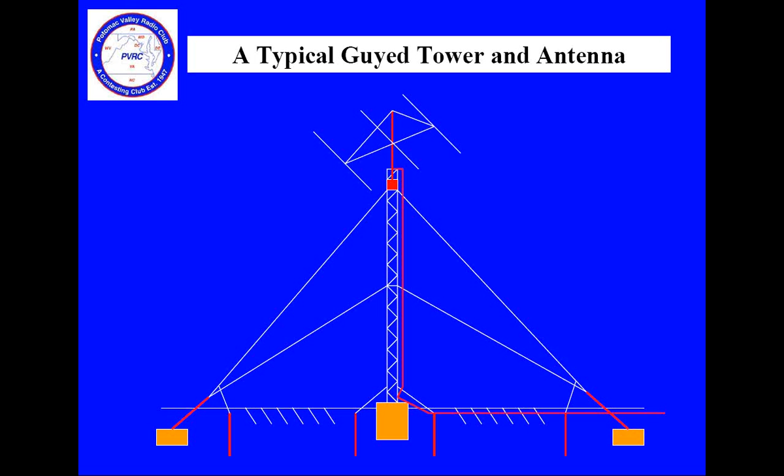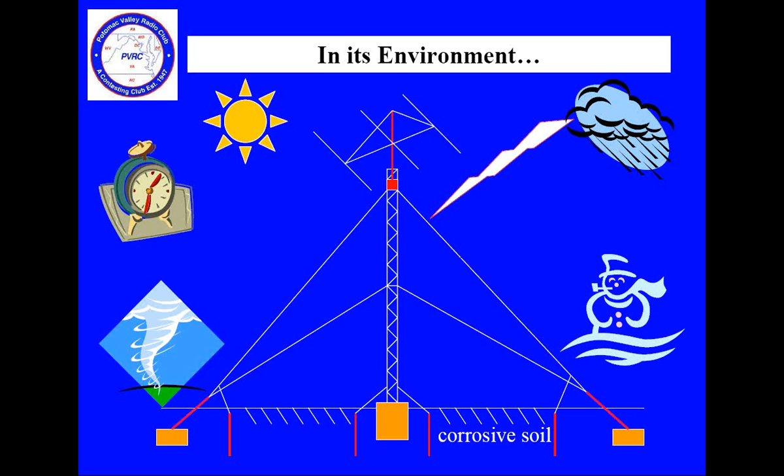But that's not all you have to worry about, because in terms of long-term survival, this nice new antenna system and tower is subject to wind and the passage of time, ultraviolet radiation, rain, perhaps very heavy rain in some areas, snow and ice. And in many parts of the world, the soil is also unfriendly to tower foundations and ground systems. So all of these things are factors that will wear away at your antenna system despite the very best job you might have tried to have done.

So let's get started. The presentation takes the form of checklists all the way through. For each element of a tower and antenna system, there's one checklist that considers important factors when designing and building a new tower and antenna system, and a second slide deals with maintenance considerations to keep the system functioning in tip-top shape for a long period of time. I won't read these slides, but I'll focus on some important points. If there are questions about points I don't discuss, I'll be happy to speak about them.

By the way, before I get into the presentation, for those who aren't aware, there's a very excellent reflector where these sorts of questions and discussions come up every day. It's on the contesting.com website, and it's called Tower Talk. A lot of these topics are discussed there from time to time, and if you're planning a new system or thinking about a maintenance problem, it's a very fine place to raise these kinds of questions and get useful answers.

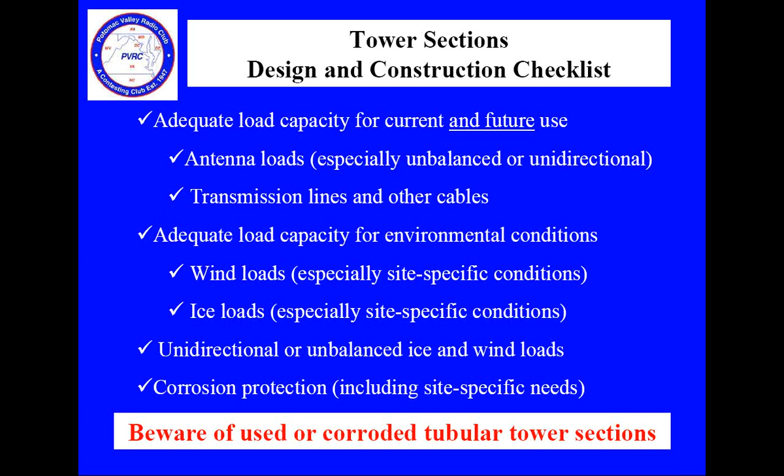In terms of maintenance, when you build a new tower, you should inspect it a year after install, just to be sure nothing surprising has happened. After that initial inspection, every 3 years you should do a very comprehensive inspection of your tower and antenna system. It doesn't take that long—go through the checklists, think about what you want to look at, climb the tower or get a friend to climb it or pay someone to do it, and check it over thoroughly. After that, the tower should be good for another 3 years.

On very tall towers, particularly over 100 feet, one thing you should do is check that the tower is plumb—that is, vertical—and that it hasn't become twisted. Except for very large antennas, most hams won't have the problem of a tower twisting, but it's very common to see towers that are no longer vertical.

To check that a tower is vertical, the most practical thing is to use a surveying instrument—perhaps you can borrow one. Another easy way to quickly check it is to use a plumb bob: hold it in your hand, let it drop to the ground, and compare the tower in the distance to that string in front of you. That's a good, quick and dirty way to do it, but a surveying instrument is better.

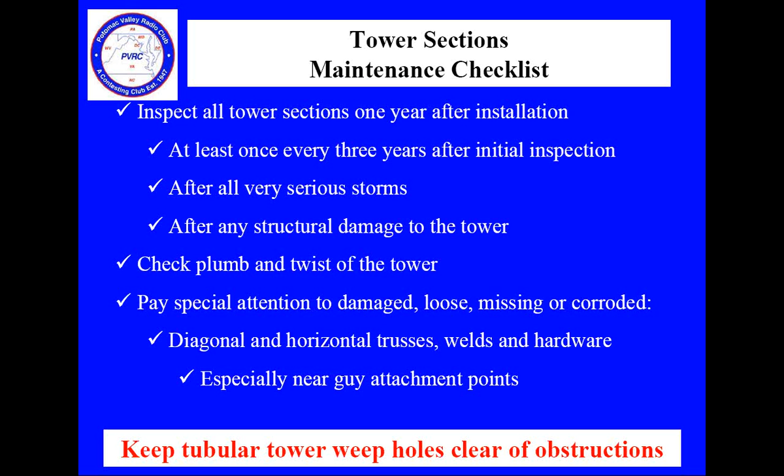One of the most common problems with tubular towers is that the weep holes at the bottom might become jammed with debris that's gotten into the tower, so check those for obstructions. A fairly common problem, more common than you'd think, is that sometimes people forget to take tower hardware out of the legs. When new Rohn towers are shipped, the hardware is often packed in the legs, and people install the tower without realizing it, which can jam the legs as things accumulate. So before you install a tower, check that the legs are all clear of obstructions and nothing is jamming them already.

Okay, so let's move on to the tower foundation. All the manufacturers have published designs—it's always wise to use their designs. If you live in an area subject to heavy frost, you might want to modify that design to make the foundation a little bit deeper.

Probably the most common error that hams make with foundations is to not have the top of the foundation well above the surrounding surface of the earth, the nearby ground. It's pretty common to see hams who thought, someday I'm going to take this tower down, and I don't want to worry about destroying the top of the foundation, so I'll just end the foundation a few inches below the surface of the ground. Well, this is a prescription for disaster.

It's very difficult to keep the top of a foundation clear if it's at ground level or slightly below. Dirt and leaves will accumulate there. The result will be that the top of the foundation will be continuously wet, and you'll develop corrosion at the point where the tower attaches to the foundation, which can lead to tower failure in just a relatively small number of years. So the best thing to do is to raise that foundation about 6 inches above the ground, and then occasionally check it when you're around it. If anything has accumulated on it, it should be removed.

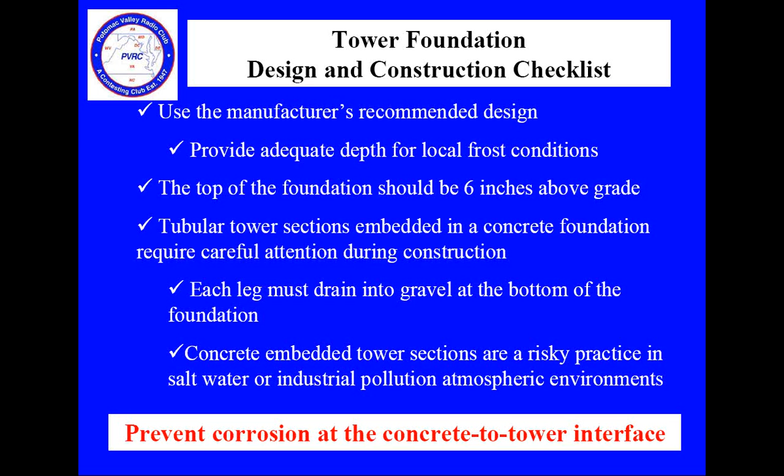In areas that are subject to salt spray, this idea of embedding towers into concrete is probably one that you really shouldn't do, because you can get salt water accumulated in those legs and it can do a lot of damage. So the best thing to do if you're in a waterfront, oceanfront location is to use a pier pin foundation. The takeaway here is corrosion at this interface between the concrete and the tower legs is really the key point, and you really want to pay attention to that. Some of us actually apply some paint to that junction just to make sure it stays clear.

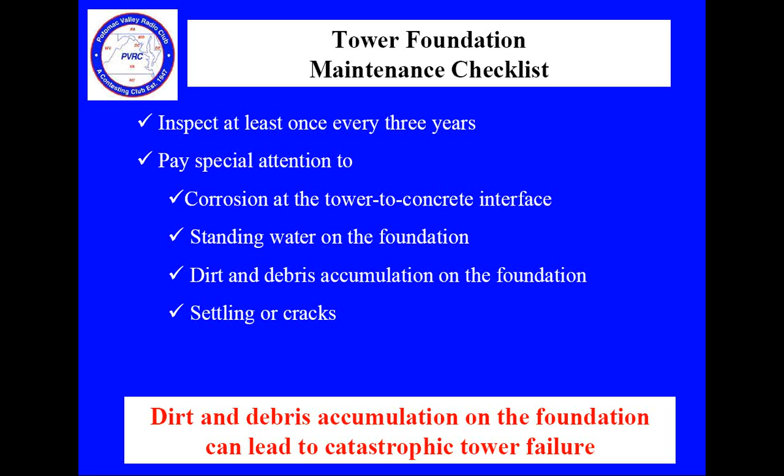In terms of tower foundation maintenance, inspecting it once every 3 years is okay. Whenever you're out near your tower, take a look and see if any junk has accumulated on that foundation and clear it off if it has. If you notice water is standing on that foundation, you might want to consider resurfacing it so water cannot accumulate there, because that will contribute to corrosion at the point where the steel and the concrete come together.

Guy anchors are probably one of the most common causes of tower failures, and they can be really catastrophic. Many areas in the world have corrosive soil. If you think you're in an environment like that, you really need to take some extra steps. Placing steel in direct contact with corrosive soils is probably not going to last for 10 or 20 years. There are all kinds of horror stories about people who've put guy anchor rods in direct contact with corrosive soil and found out 10 years later that there's really not much of an anchor left. So if you have corrosive soil, you might want to think about using a concrete guy anchor and only having the steel in contact with the concrete, not with the ground.

A common error is for hams who are less experienced with towers to go to the local hardware store that sells items to homeowners and buy guying material and guying hardware from that store. That's a really bad idea. I've never seen heavy-duty forged hardware for sale in these homeowner type stores. You really want to buy all of your guying hardware from a company that sells towers, and they will have the right stuff. There are plenty of those companies around the world, and that's where you want to buy this hardware. If you really can't find anything like that, then an industrial supplier that supplies the shipping industry or crane companies will have the right hardware also. But you're better off buying it from a tower distributor.

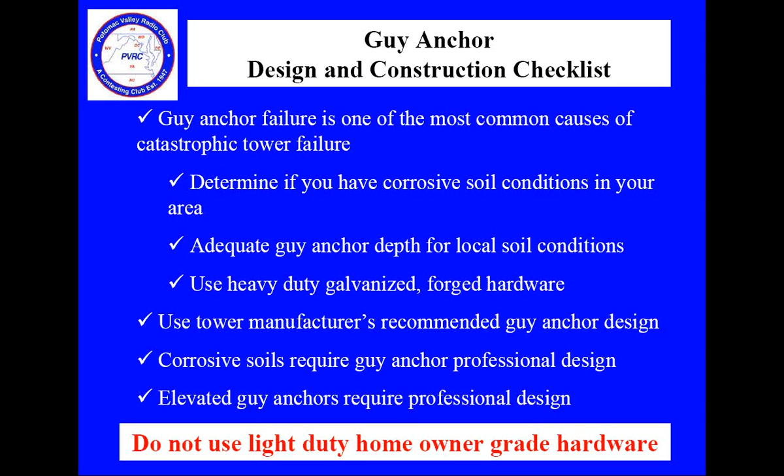You always hear from hams that want to put up elevated guy anchors. It's a very common thing you might want to do to keep lawn equipment and people away from the guy anchors. But if you want to do that, the design for an elevated guy anchor should be done by a professional. Just going to the local hardware store, buying some pieces of pipe, putting it in the ground with a bit of concrete is likely to lead to a tower failure. So this is one of the few areas in this presentation where contacting a professional to design those elevated guy anchors could save you a lot of trouble.

In terms of maintenance, this is another area to look at every 3 years. If you have steel in contact with the earth, as you might with a galvanized steel guy anchor, just take a shovel and dig down 6 inches on one side of the anchor and make sure there's no unexpected corrosion there. If there is any, time to start thinking about replacing that anchor. Look for missing hardware, loose hardware, or corroded hardware.

I usually keep a pretty good track of this, but I was replacing some old guy wires just 2 weeks ago, and I was shocked to find that one of the bolts on one of my turnbuckles was nearly completely loose, and that could have led to a disastrous failure, and I had missed that. That particular anchor was in a place that was a little hard to get to, and I don't think I had actually checked that particular bolt in quite some years. It's probably been loose for a long time, and that could have been disastrous, but thankfully we caught it, and hopefully that's the only one.

So I'll just focus on the importance of anchor rod corrosion. It's useful every 3 years or so to just get out the shovel and take a look at that anchor and make sure it's okay.

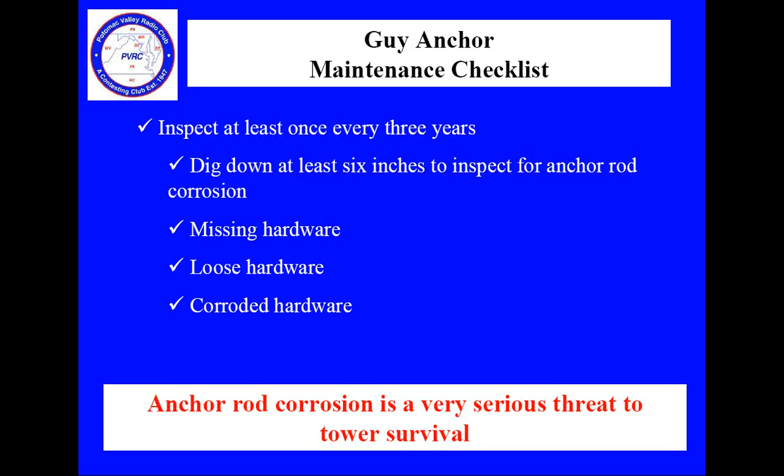I think I went one too far here. Guy wires.

Don't use that homeowner grade guy wire material or galvanized wire clips. Get it from a hardware company. Use the manufacturer's recommended guy wire size. This is an area where you don't want to use guy wire that's smaller. If it says use 1/4 inch EHS, use that, not 3/16. Also don't use heavier wire either, because you have to tension it heavier and you reduce the capacity of the tower. So use the recommended guy wire size.

It's recommended that you tension the guy wires at about 10% of the breaking strength of the guy wire. Precision isn't important here, but about 10%. If it's about 7% or less, the guy wire will be noticeably loose, and when you get a heavy wind, the tower is going to have excessive movement as it tightens that guy wire. Similarly, if the guys are too tight, it reduces the capacity of the tower and also risks guy wire vibration.

For those of you who use fiberglass rod for guy wires, that's what I use rather than Phillystran or steel. If you're in an area that's clear of obstructions, you might have a problem with vibration. If you do notice vibration in your guy wires, it's important to do something about it, because that can damage your tower.

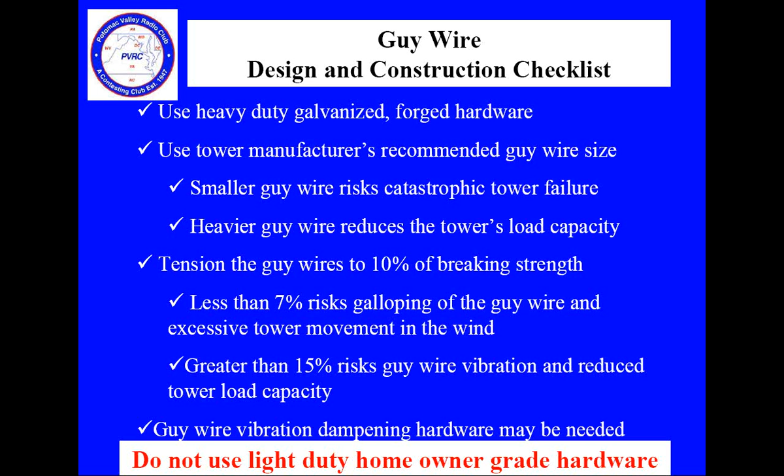You can buy from Preformed, the same company that makes the Preformed guy wire attachment hardware, vibration dampeners. So if you notice vibration on your guy wires, you really need to do something about it, because it can lead to catastrophic failure.

In terms of maintenance, this is one area, because there are so many attachments, that it's a good idea with guy wires to inspect them 3 months after the tower installation is complete, and then once every 3 years is okay. Also, if you ever have a very serious storm, either heavy ice accumulation or very intense wind, it's a good idea to check your guy wires after that too.

Once every 3 years, you should check the guy wire tension. Once you get used to what a guy wire looks like when it's under the proper tension, usually you can just grab it with your hand and give it a good tug, and you can tell when it's approximately correct. If the guy wire moves a lot, it's too loose, and if it barely moves at all, it's probably too tight.

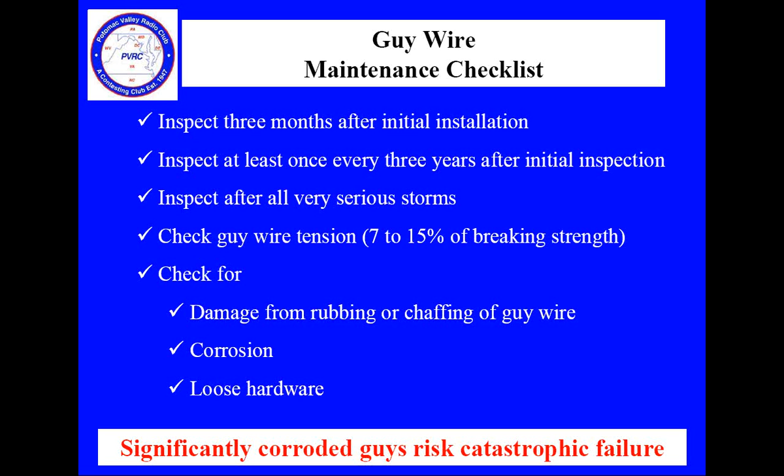Guy wires can get damaged by rubbing or chafing on other objects, especially other antennas or other guy wires, so be sure there isn't any rubbing or chafing. I'm in the midst right now of replacing all of my guy wires. They're 25 years old, and corrosion has gotten to be a problem. So if your guy wires are getting to be 25 years old, if you start to see rust on them, it's a good idea to start replacing them. And I already mentioned the loose bolt that I found on my guy wires a little earlier.

Another very important consideration is the point where the guy attaches to the tower. If you're using a guy tower, you should be using the tower manufacturer's design. None of them recommend running the guy wire around a tower leg. They all have attachment hardware, and that's what you should be using. Should be using professional hardware, as I mentioned earlier. Turnbuckles should have safety wires around them to make sure they don't unwind.

Many of you have probably not heard of this term, articulated guy wire connections. What this means is, in the wind, the guy wires are going to move, and they should be free to move. The hardware you use for attaching the guys to the tower should allow free movement of the guy in any direction, about 10 degrees. So if you're using shackles and that kind of hardware, you'll get this kind of free movement. If you don't have this free 10-degree movement, it's

really not a properly done installation, and could damage the guy wires over time. And I actually did have a failure of this kind years ago, where I attached a guy wire directly to an anchor without any intermediate hardware, and the rubbing over years of the guy wire on the anchor ultimately caused the guy wire to fail. I did not notice this until the guy wire was actually broken. So you really shouldn't be attaching guy wires directly to anchors. They should be attached through some intermediate steel hardware.

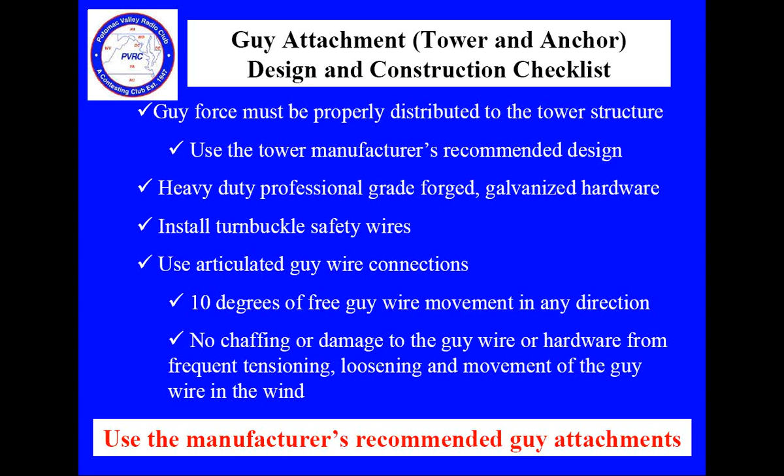So I'll just close this one out by saying do what the manufacturer recommends. And in terms of the guy attachment, in your once every 3-year inspection as you climb the tower, take a look, especially at the point where the guy's attached to the tower, and make sure all is well.

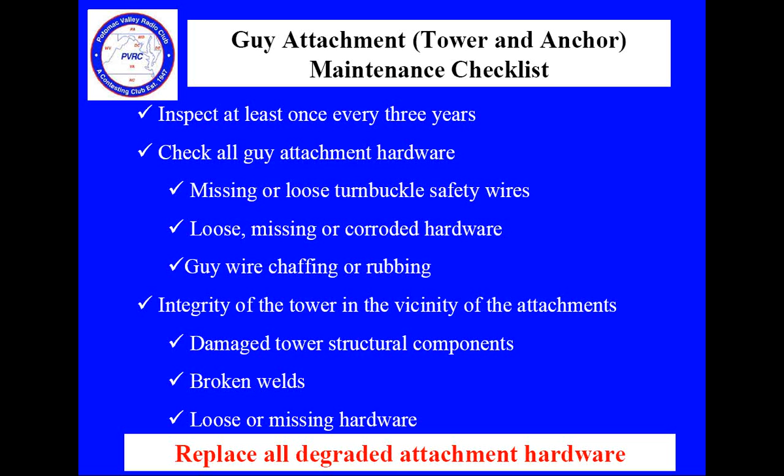At the guy attachment on the ground, make sure that those safety wires are still there and there are no missing pieces of hardware. You don't see any evidence of chafing or rubbing. When you climb the tower, or someone does that for you, carefully check for any damaged structural components on the tower, especially near the guy attachments where the forces are the greatest, and look for any broken welds. And if you find any degraded hardware, it's a good time to replace it.

Well, if you're in an area with lightning, and most areas in the world are subject to lightning, part of the design of the tower should be the grounding system. The kind of minimum lightning protection system would be one ground rod adjacent to each tower leg. And normally those ground rods are separated from the tower foundation about 8 to 10 feet and separated from each other about 20 feet.

Today, tower manufacturers recommend, believe it or not, using galvanized ground rods rather than copper. And the galvanized ground rods are readily available from electrical suppliers in the United States. If you can get a 10-foot length, that's the preferred length, although 8 feet is more common.

And the tower manufacturers no longer recommend using copper wire to attach the rods to the tower. They recommend using tinned solid wire. The reason for this change is to eliminate galvanic action. Copper grounding hardware and galvanized steel towers can lead to a corrosive environment, so the manufacturers no longer recommend using copper rods and copper wire. They're recommending galvanized rods and tinned ground wire.

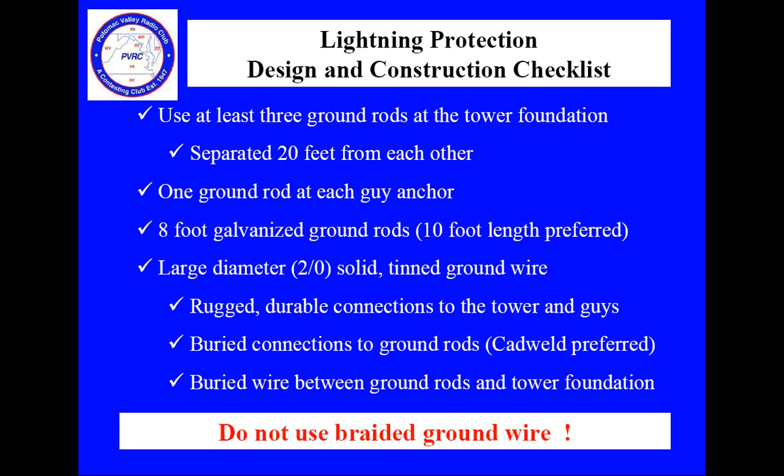In terms of maintenance, check your lightning protection system once every 3 years, mostly for missing hardware or any damage that might have occurred from lawn equipment or something of that kind. And if you find a problem, repair it.

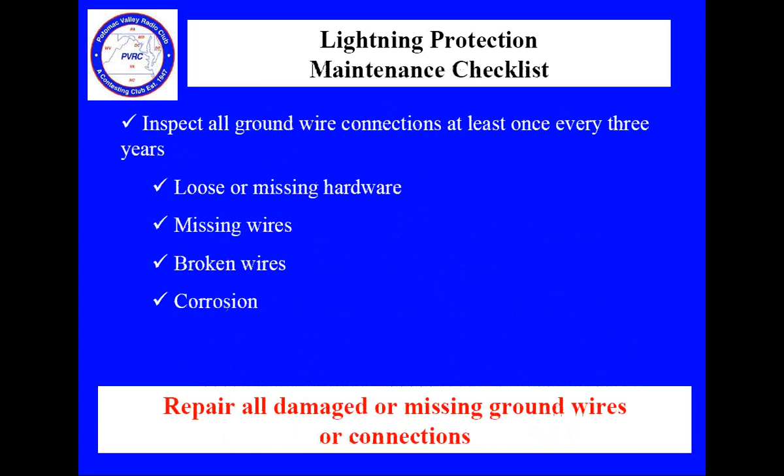Antenna rotators. This is a troublesome area for a lot of hams, and this has become particularly a problem for hams that have installed these fairly popular monster Yagis. These are very large antennas, and most hams are unfamiliar with the kind of wind loads that these very large antennas with 60-foot elements will put on a rotator. Many of the hams that have put up monster antennas have wound up going to prop pitch rotators. Normal ham rotators will not keep it up in anything more than a fairly strong breeze. But even for smaller antennas, very seriously consider the capacity of the rotator, particularly if you're in a high wind area or subject to ice loads.

Use the manufacturer's recommended control wire, especially if the wire is longer than 100 or 150 feet. You might want to consider beefing up the control cable. Most of the rotator manufacturers have recommendations in this regard.

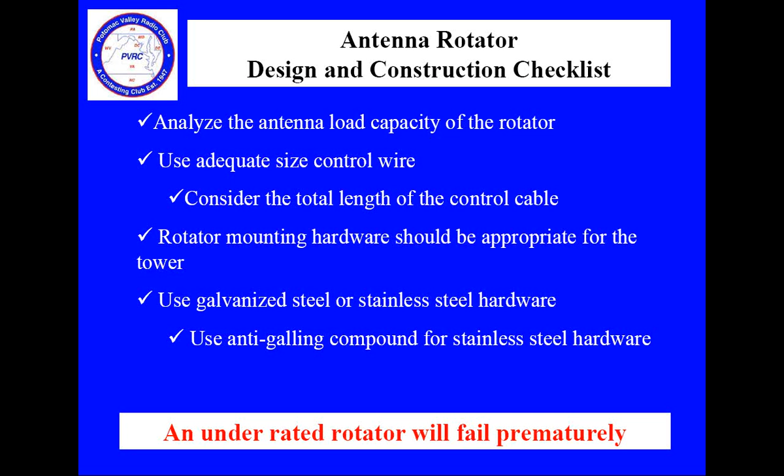So when you're building that new system, pay careful attention to that rotator and don't undersize it, or it could make for a system that doesn't last for 5 or 10 years, but that maybe in a year or two will require major maintenance.

The antenna rotator is another one of these areas where you should inspect it 3 months after you install it to make sure nothing is slipping or no hardware is loose, and then every 3 years after that should be okay. You might take a look at your antennas in the wind and make sure there isn't any unusual mechanical movement. And then when you do that 3-year inspection, look for corroded hardware or hardware that's become loose.

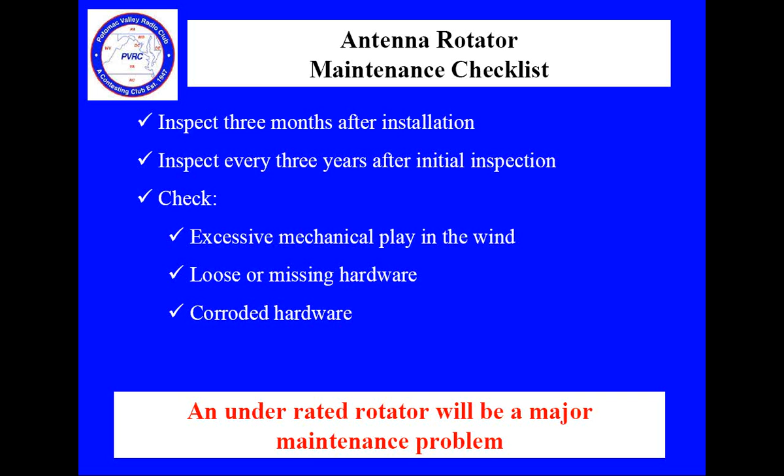So, antennas and masts. Be sure, when you're thinking about the kind of antenna you're going to install, that you give due attention to the wind and ice conditions in your area. If you live in a normal suburban area at relatively low altitudes and not on a ridge, then normal ham antennas designed for moderate loads will probably be fine. But if you're building the antenna system of your dreams up on a very high exposed hill or mountain, there's a pretty good chance you might need custom-built antennas, or to build your own, or to purchase some of the heavier-duty ham antennas that are out there rather than the less expensive ones.

I've already mentioned galvanized and stainless steel hardware. That's very important in antennas. Hardware will not last very long exposed to the weather like hardware will be exposed at the top of a tower.

I always put vibration dampening in all of the elements of my antennas, and just rope loosely run through the middle of the elements does a pretty good job of vibration dampening. I've never had an element break from vibration in all the years that my antennas have been up. Another fellow was helping me build one of my antennas a year ago and noticed me putting this vibration dampening rope in the elements and said, 'Gee, I didn't think anybody did that anymore.' Well, some of us do. And he commented, 'Gee, I thought that's kind of an old way of doing things.'

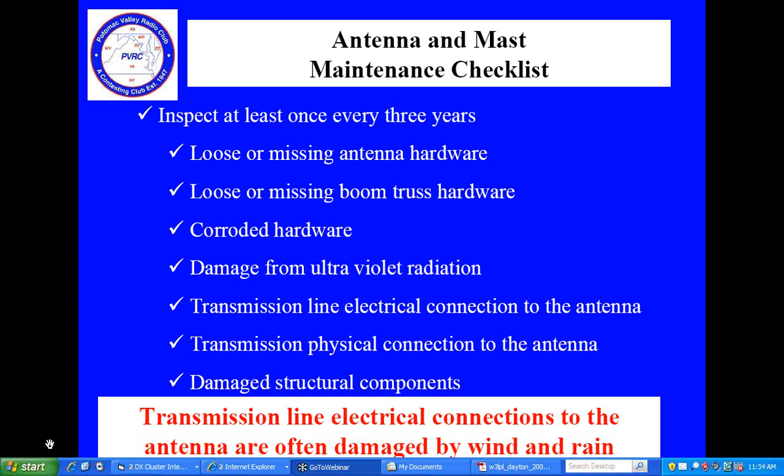Okay, well, I think we'll go on to the next slide. Oops, I've gotten into this frozen situation. Now I know how to correct it. Okay, let's see.

Transmission lines and other cables. If you're going to have a tower up in the air for a long period of time, ultraviolet is a factor. I installed my antenna system 25 years ago, and a lot of my control cables are type UF electrical cable. Believe it or not, the UV, after about 15 years, started degrading that stuff pretty badly, so I've had to replace quite a bit of it. I think this is a case where selecting the right cable and then doing inspections matters, because type UF cable is no guarantee that UV is not going to get to it. Most of those cables' jackets are completely vanished after 15 to 20 years.

So the cables hanging from your tower are going to be subject to a tremendous amount of ice load if you're in an area subject to ice, and certainly a lot of wind also. They should be well attached to the tower as the cables drop down. A very simple material used by professionals for that is number 12 solid insulated copper wire. You can form that into a nice attachment onto the tower, and it's inexpensive, and you can just do it by hand, no special tools needed. For those that prefer tape, a good high-quality tape such as Scotch 88 is also a good choice.

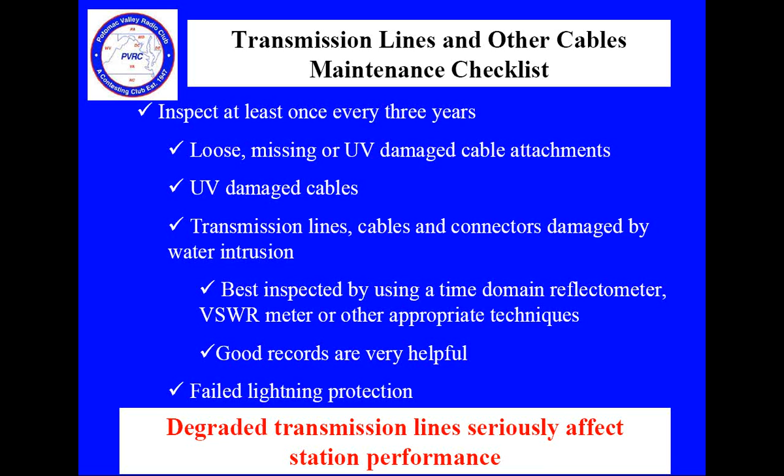So let me just wrap up the whole presentation here. This whole presentation really was a set of checklists. I'm sure this presentation will be available online, or you can find just the slides on w3lpl.com under the 2006 Dayton Antenna Forum, where this presentation was originally given.

The checklist will help you avoid common design and construction errors. Very few hams have an organized inspection program. You should think about doing that every 3 years or after any major storm. It's a very important factor in long-term tower and antenna reliability.

And Ken, that's the end of my prepared remarks. I'll be happy to answer any other questions. Excellent, Frank. Okay, yeah, we have a couple more questions here.

The first one from Mark is on vertical runs of coax on the tower. Do you have to worry about the dielectric migrating downward over time? Hello, Mark. Normally that's not the case, although I can tell you that when I first built my antenna system 25 years ago, I used RG17 on my vertical runs, and it did migrate.

In fact, what migrated actually was the dielectric inside the braid of the cable. So I stopped using RG17 after a few years. But I've never had RG213 or Heliax cable migrate, and that's mostly what I now use on my towers—Heliax cable—and that's not a problem. But with RG17 it was a serious problem.

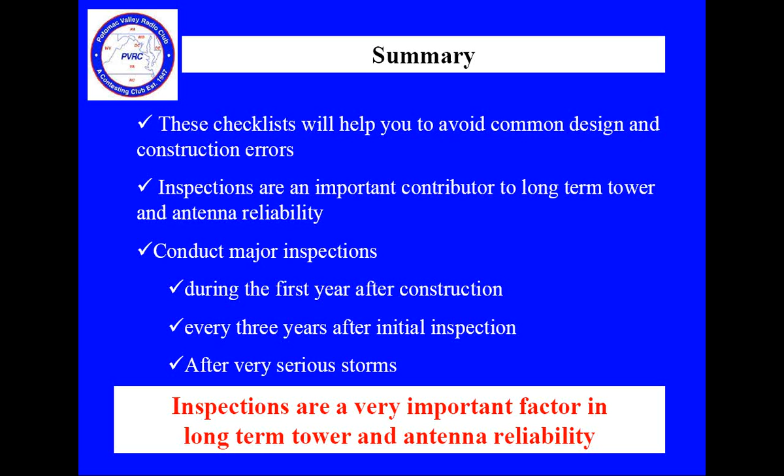Well, W2GD did that work—John did that work, I guess 3 years ago. It's holding up very well. My towers are actually quite old; I installed them 25 years ago, but they were military surplus and probably had been in use at least 25 years before I acquired them. But the paint is doing quite well. Like any paint, I would expect after 5 or 6 or 7 years it'll probably need redoing, but at the moment it's doing fine.